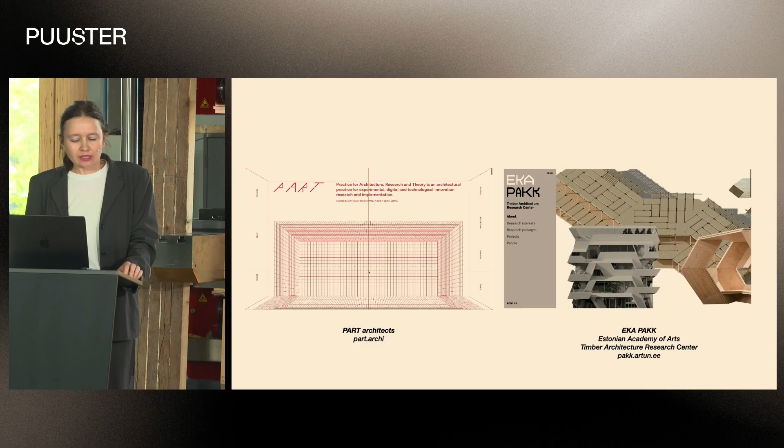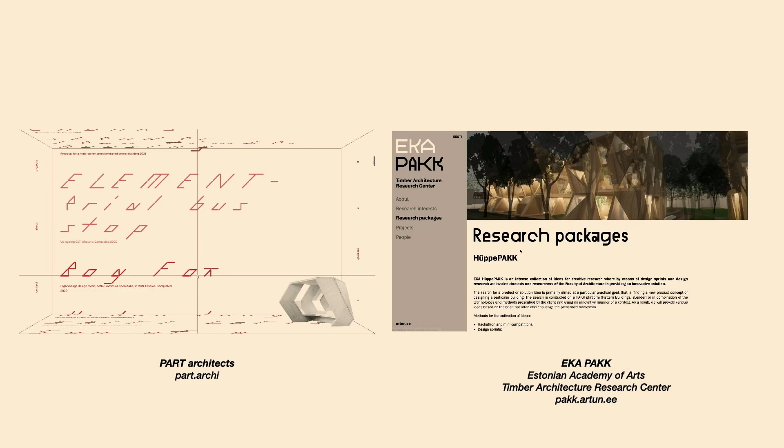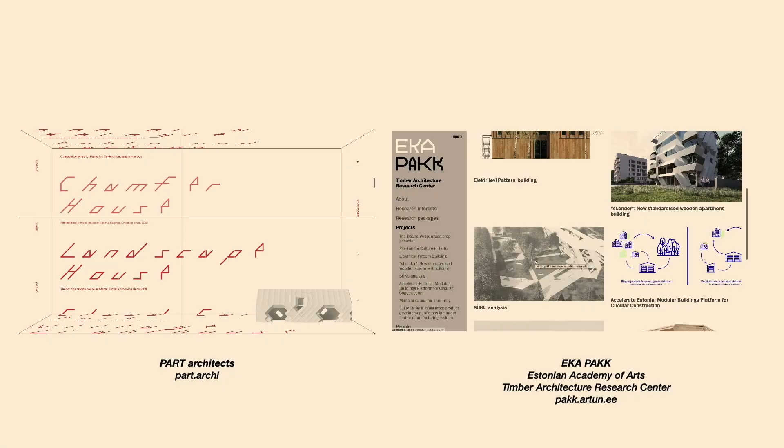The office called Part Architects was started like 10 years ago, and now since 3 years ago, we actually have the Timber Architecture Research Center, PAKK, initiated. And why I'm telling those in parallel is because they are strongly connected to each other. As strongly as saying that with my office partner, we both defended our PhDs in 2020, and since then we became from junior researchers to researchers and started our own algorithmic research group.

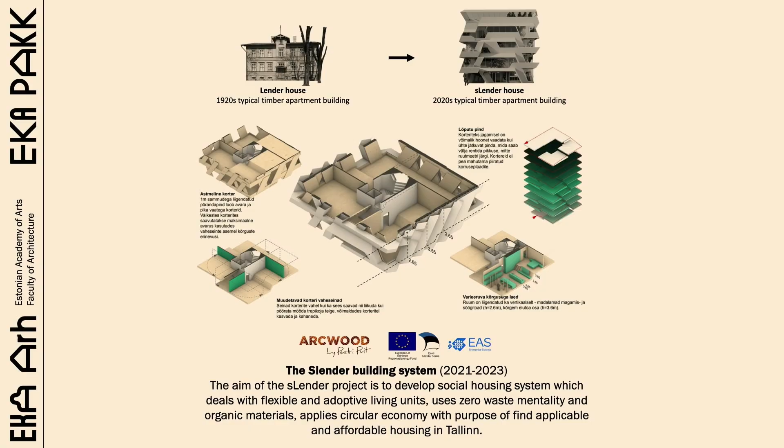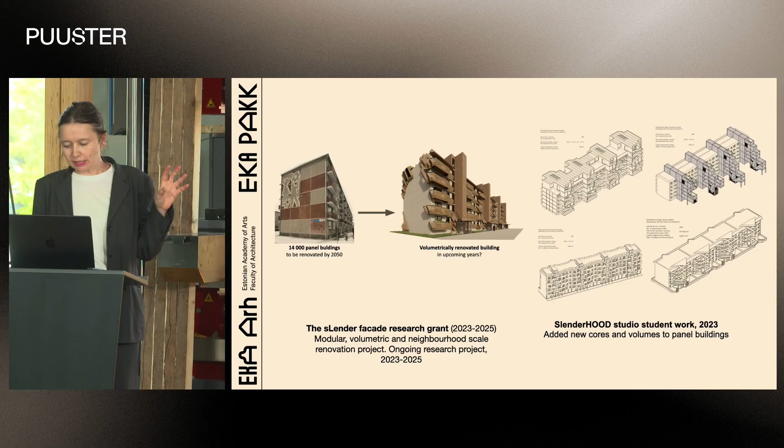With these projects, we actually have been through several studies from the scale of buildings, like a typical new contemporary apartment building for Tallinn, up to small scale bus stations, as well as large-scale renovation wave. But I'm not gonna stop too long on this now, because there's several projects, several scales.

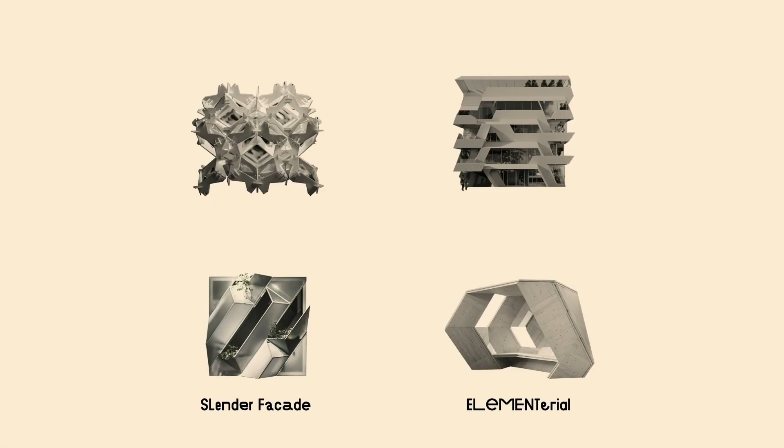I would actually dig into two of them. One direction is the slender facade. Slender is the reference to slender buildings, and the other direction is ELEMENTerial, looking at the residues of CLT.

So slender facade is tapping into renovation wave in the most sustainable possible way, meaning how we can better the life qualities of the people in those apartments. 14,000 panel buildings need to be renovated by 2050, 1,600 is done. So we still have time and a chance to look into bettering the life quality.

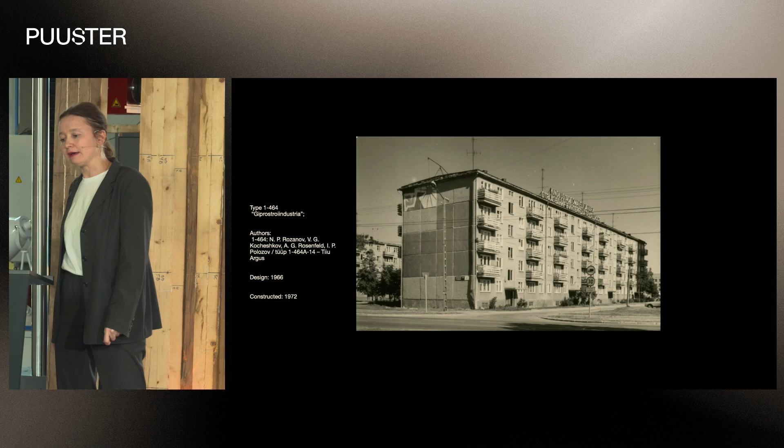This is one of the rare panel buildings that actually have balconies. At one point we started constructing only Khrushchyovkas, where the ceiling height had lowered, the panels, the balconies were reduced, and the windows were smaller.

But what's important is that they were all prefab, and prefab is something that the timber industry in contemporary Estonia is now also trying to re-specialize on, actually prefab panels, mostly connected to insulation.

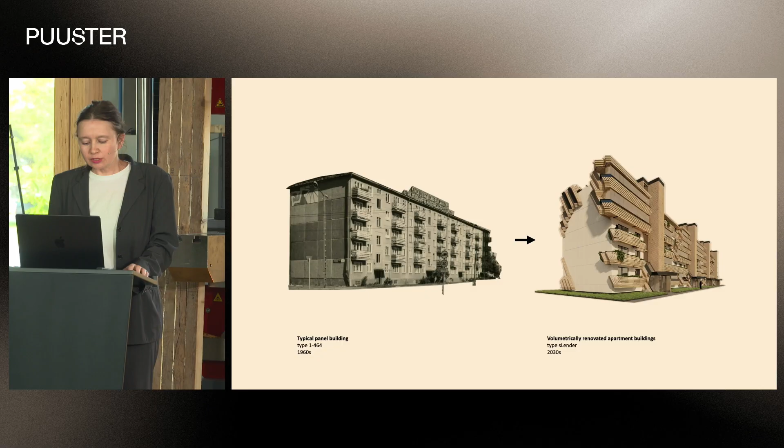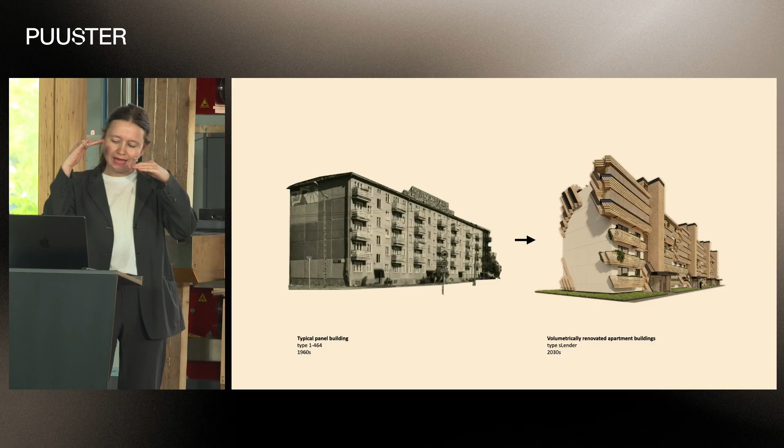So our question was, if we could come from those 60-year-ago buildings into the contemporary world, what's the new layer, the new historic layer that we should add on top of them? Should there be a room extension? Should their accessibility be bettered, etc.?

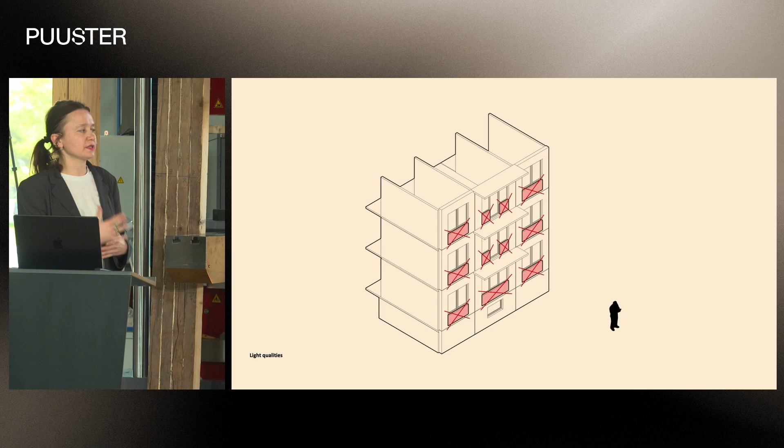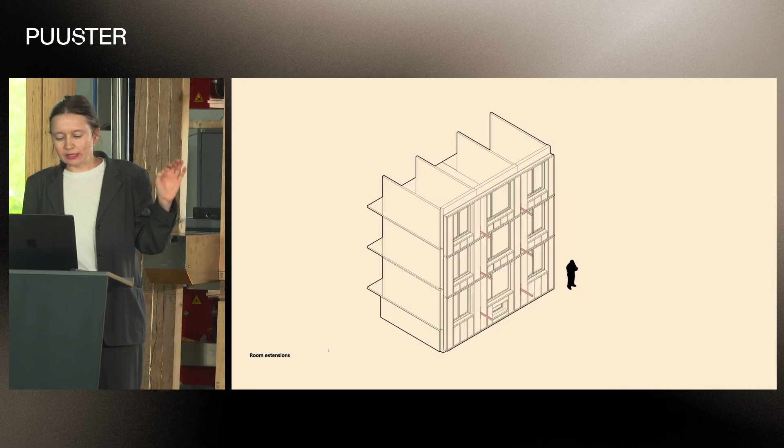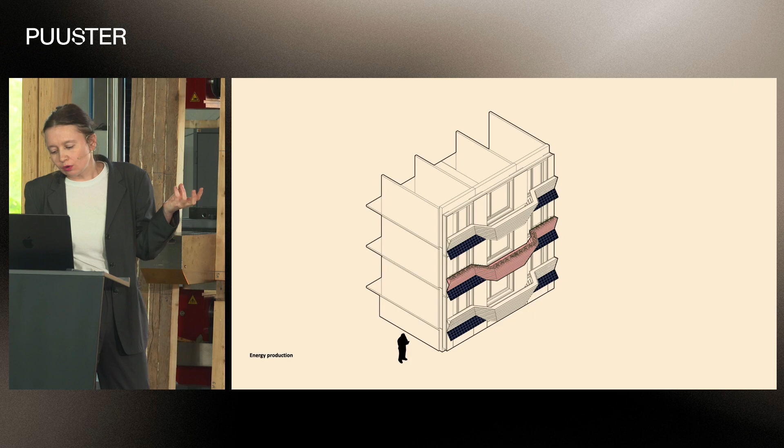Just a few simple moves that we have proposed in our 2-year research grant: what if we would take away the lower part of the apartment windows? What if we add the insulation layer within, where a hidden new structure is embedded, where the cantilevering parts would then be able to hang new balconies?

Whether they're French balconies or energy-producing balconies, or even closed ones. Or what if you extend all the windows that you have in your 2-room apartment into 11 additional square meters?

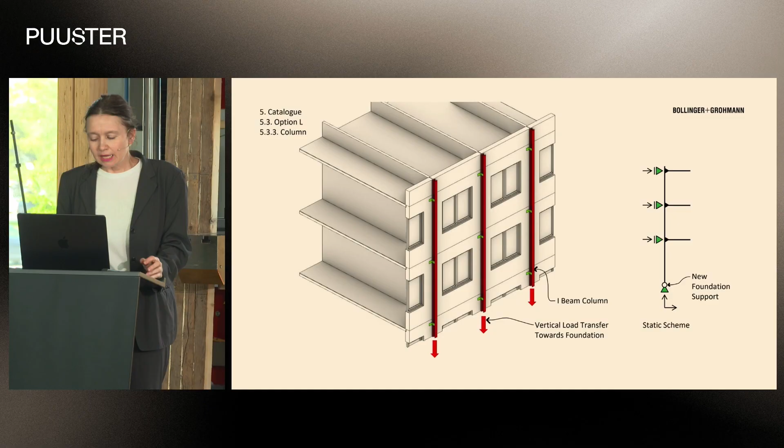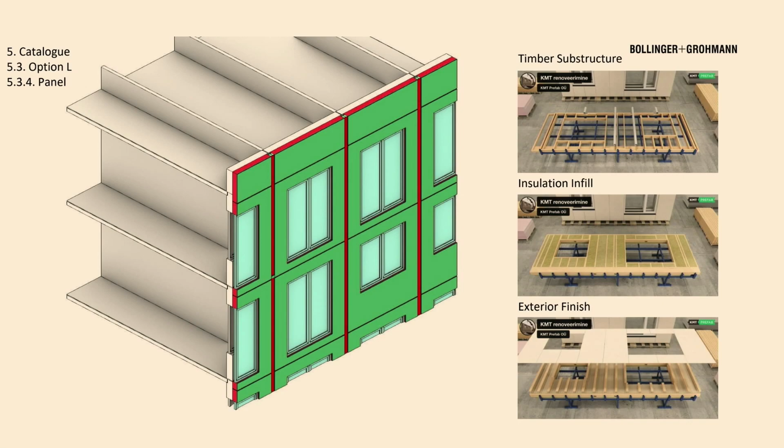This project's been done together with Bollinger Grohmann, an engineering company, really taking a deep dive into how we could implement that now today and how to raise the affordability of these solutions.

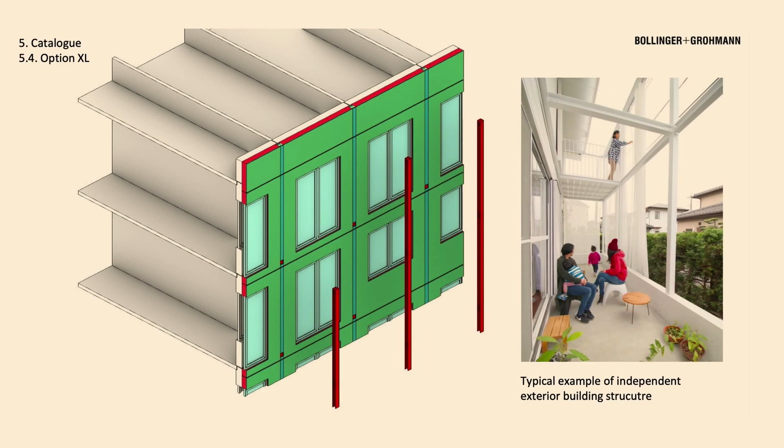Here we look at the steel skeleton at the moment, looking at the maximum cantilevers. It turns out that 1.2 meters is feasible to be extended, the depth of the balcony. But of course, if there's a chance, we can always add poles, add posts to go down and extend it even further.

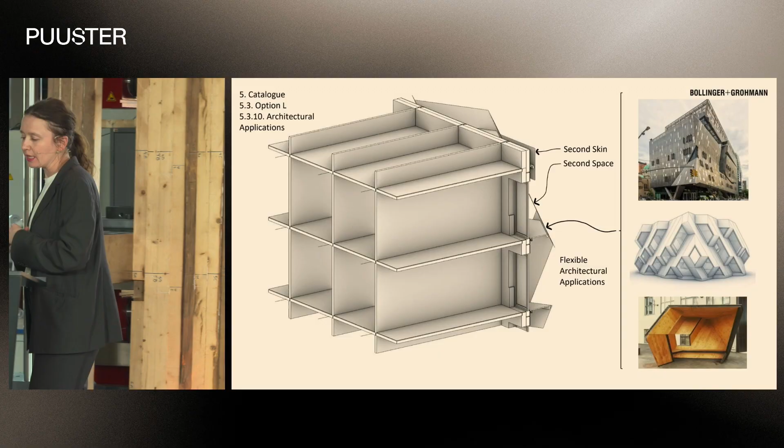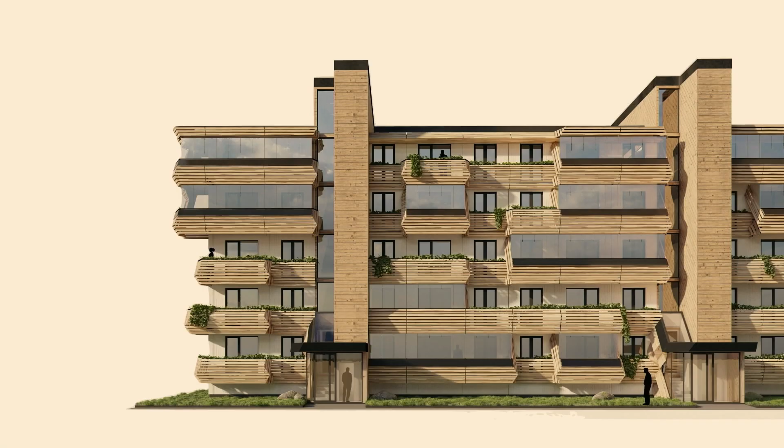But the problem of most of those apartments is the fact that we don't have the land, they don't own the land surrounding their buildings. So basically we are setting up this kind of second skin possibility, and this could be then filled with whatever. It could be filled with unheated spaces, which will have a possibility to be like winter gardens, but of course also extend the famous 8 square meter kitchen. Like all those apartments were with an 8 square meter kitchen, what if we would have actually an additional 11?

And in terms of materiality, so let's get into the timber now.

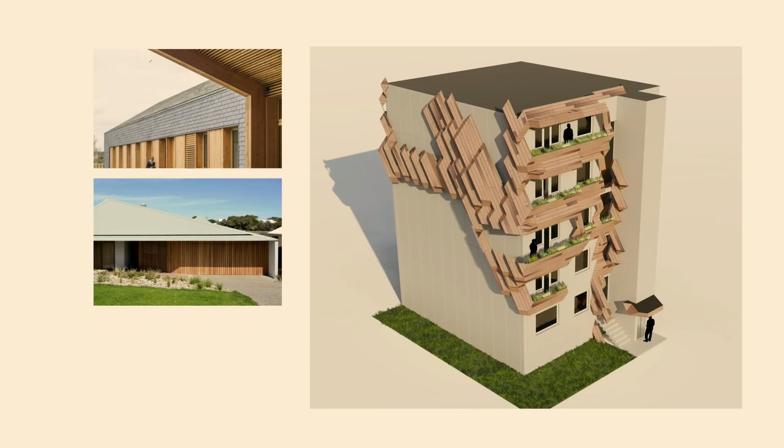I think it has to have a strong contrast. This new layer that we're adding should have a contrast to existing buildings, maybe softening the environment of those areas.

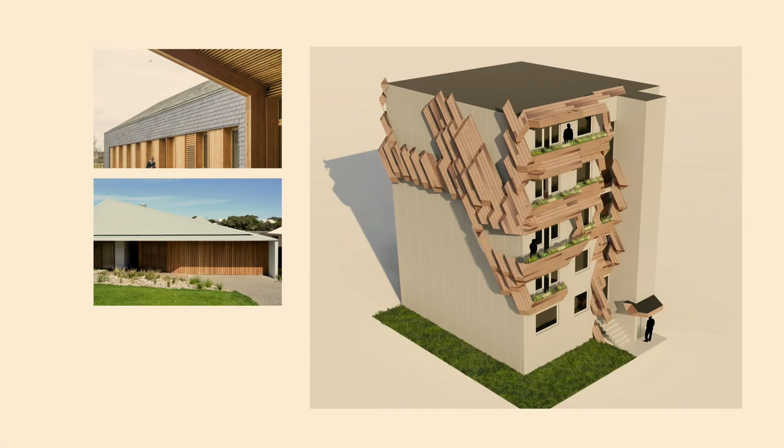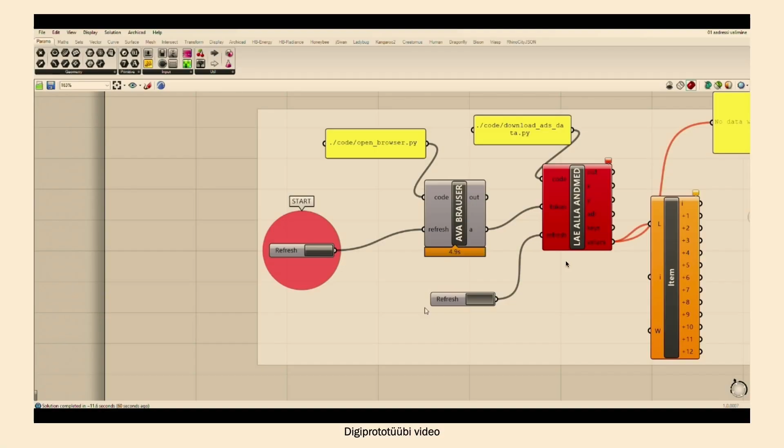What we have been working on is mostly a digital tool, how to bring that back to the users, how to make it possible to work on it algorithmically, automatically, to get information from the digital twin and bring this into your working board, for example, even for architects.

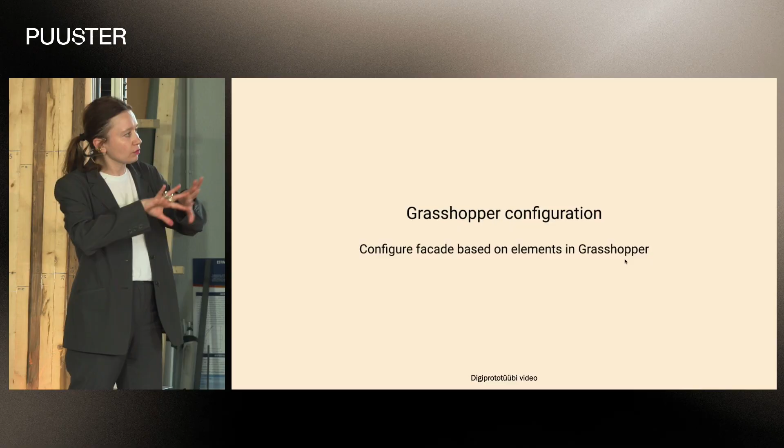I can imagine being an architect and then having this 3D model imported right away with all the surrounding geometries, and then work on this. Maybe this is more of a view of how one apartment owner can start looking into what kind of balconies they want. Basically, what we can do is take this very homogeneous environment into a much more heterogeneous one.

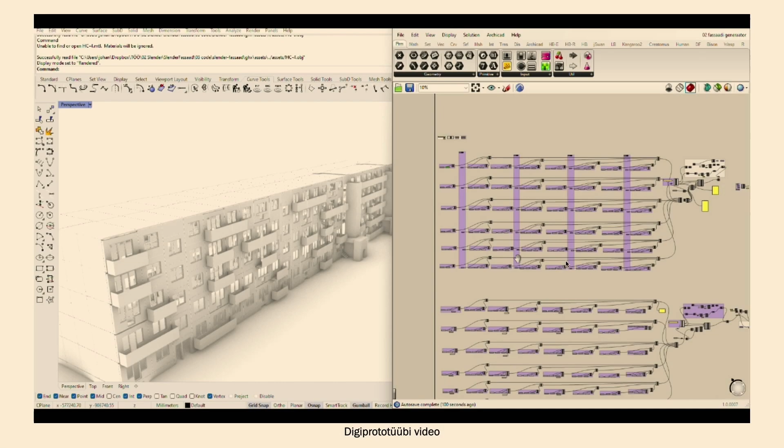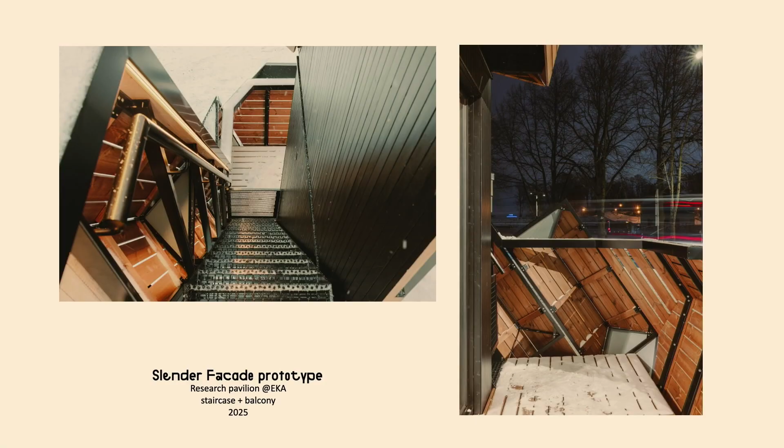Yeah, that's my hope for where the future of renovation would go. In order to convince people—we used to build churches to convince people into believing in religion. I think we're still constructing small chapels.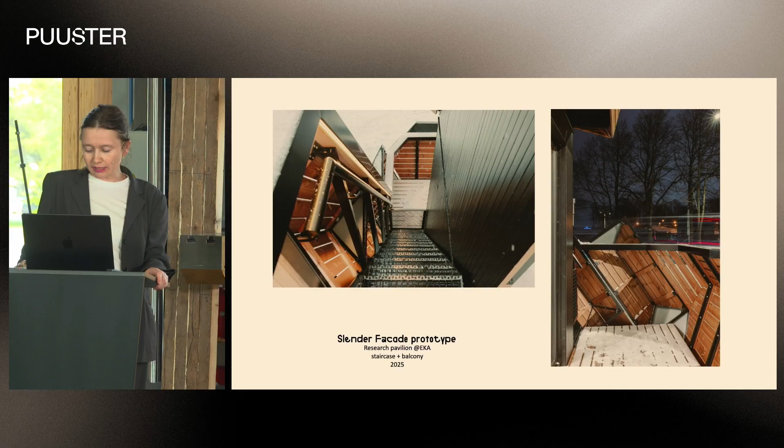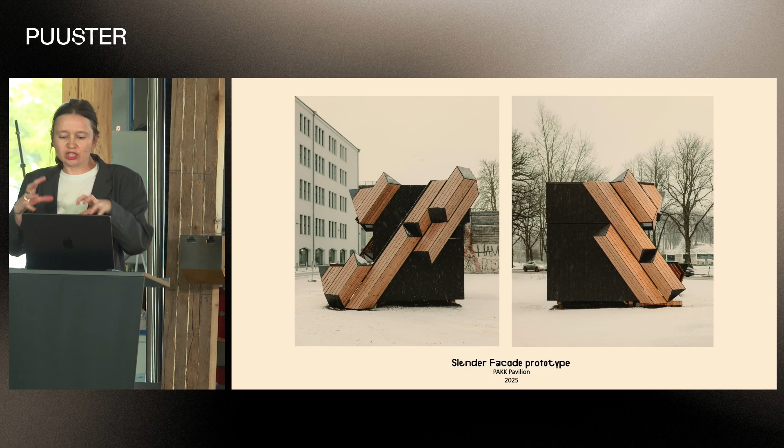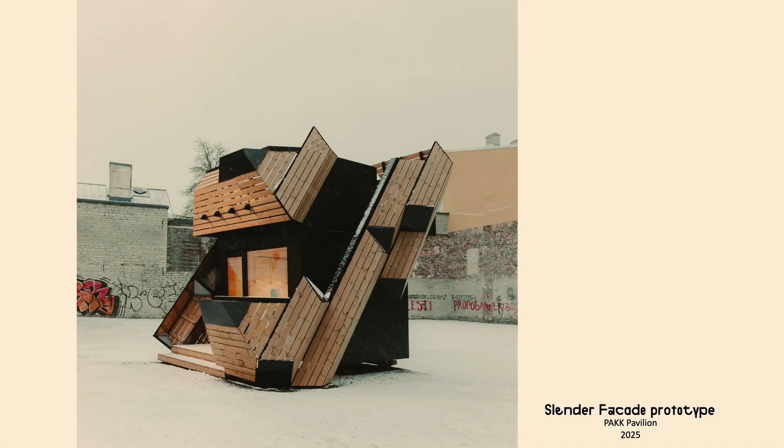This one is constructed next to our university, Estonian Academy of Arts, where we tested all those additional elements: the staircases, the balconies, the chunks that could be energy collecting surfaces, as well as planters in front of the building. So we take this black box as a fixed geometry, the existing building geometry, and then we added the volumetric facade.

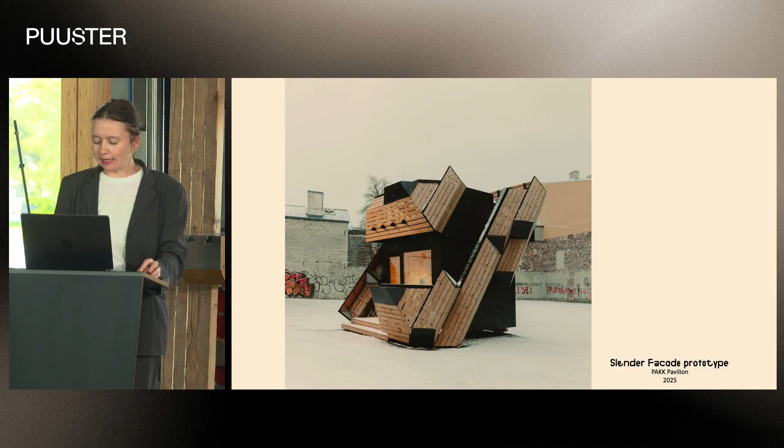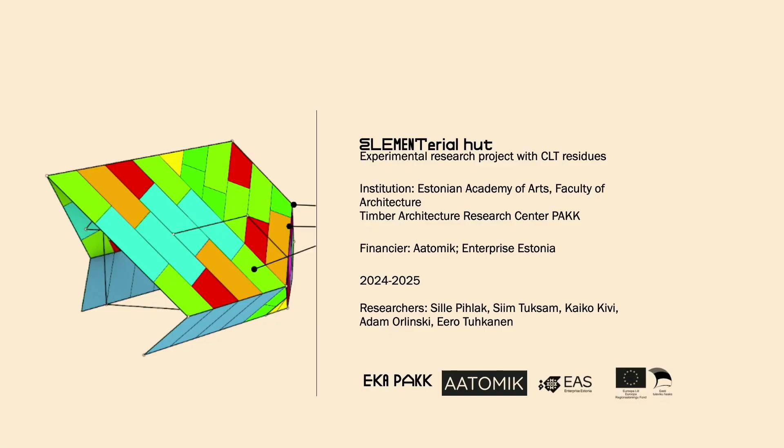Now jumping to another side, the SLEMENTerial study. As said, in 2020 we already looked into that, and now 5 years later we've been asked what if we continue this study, by Aatomik, as well as looking at the residues of what we can do with it. The residues are quite simple output of the CLT industry.

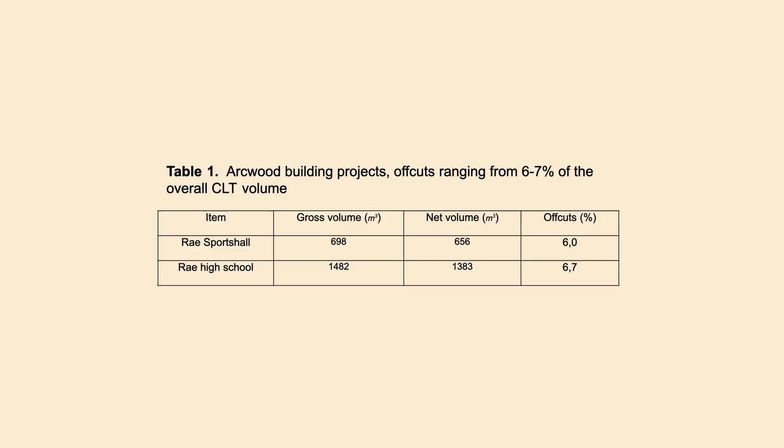All those windows and doors that are cut off—available information says it's up to 20%. We asked our biggest CLT producer in Estonia, Arcwood, what their percentage is, and it's between 6 and 7% of the material used being an offcut. That's a huge number.

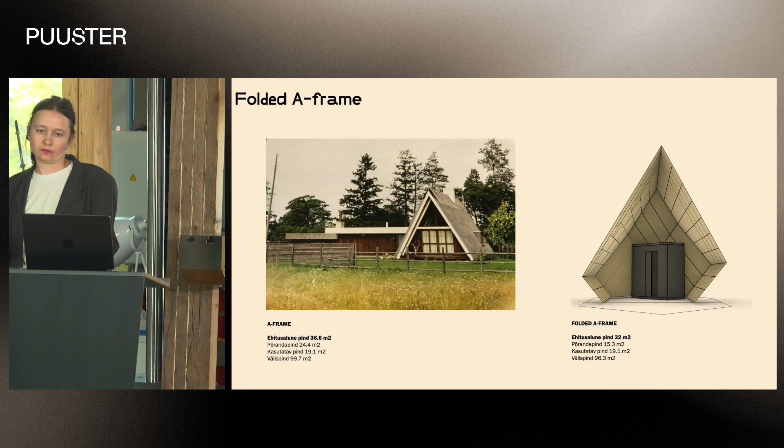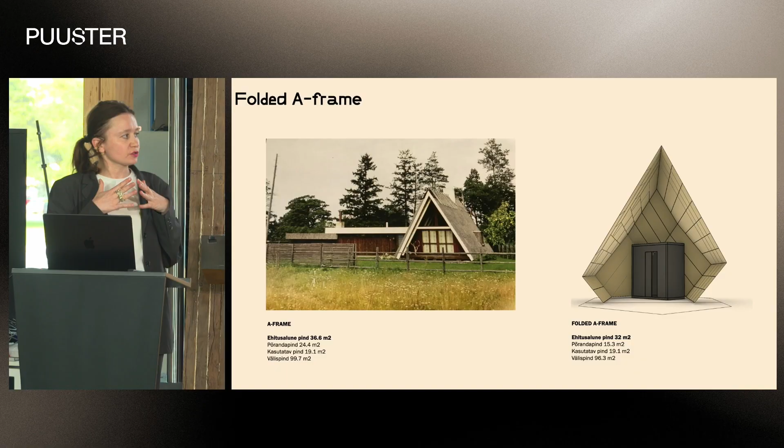So the question was, can we start constructing out of those residues? We looked at the normal A-frame sort of 1970s typology for summer housing, and we realized there's this strong direction, a strong connection. What if we break it back in, and have much more of the building surface underneath in this case?

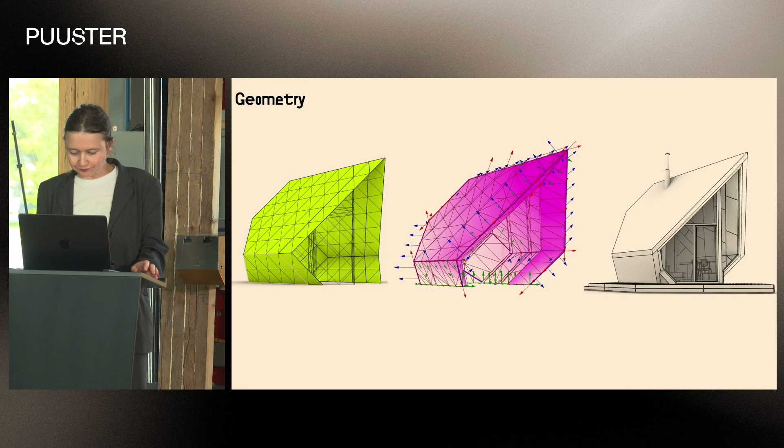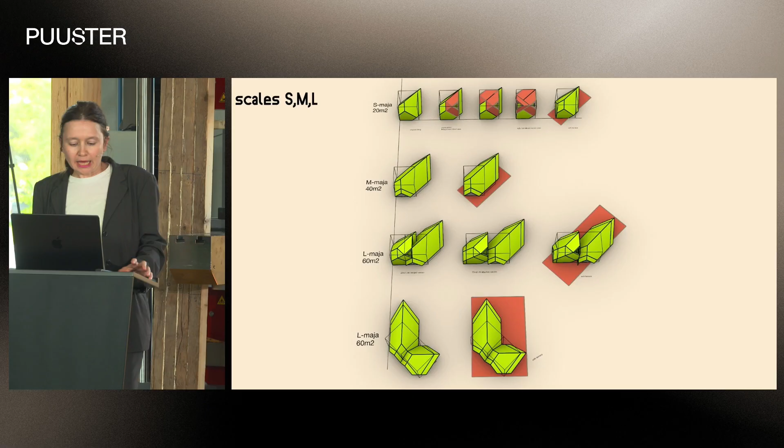And then, of course, working on the geometry, the structural studies, and resulting within this 4-month research project into a building. These are the S, M, L scale buildings ranging from 20 to 60 square meters, looking at ways how the sauna house could grow into a bigger family house.

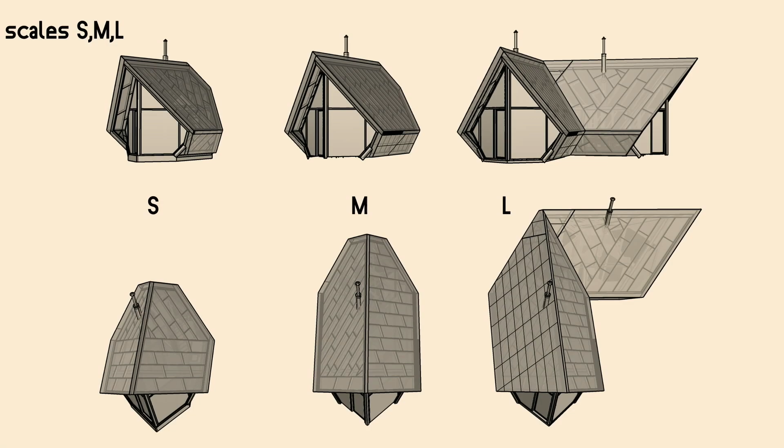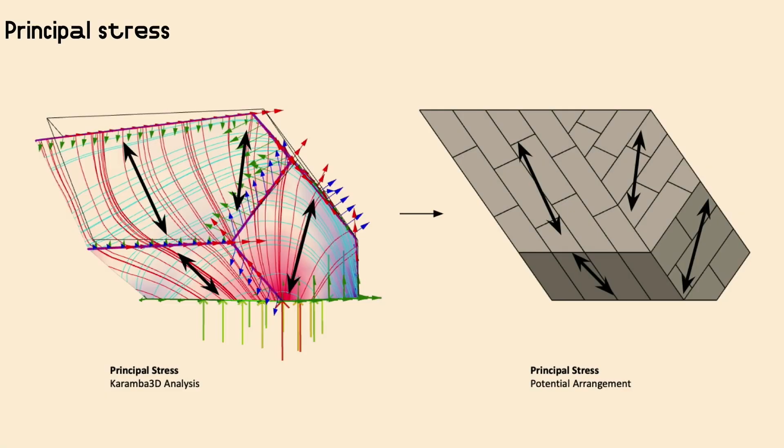Our structural studies in terms of the internal forces, the different kinds of tools that we applied, again together with Bollinger Grohmann, helped us understand how we should stitch our elements together, following the principal stress directions of those elements.

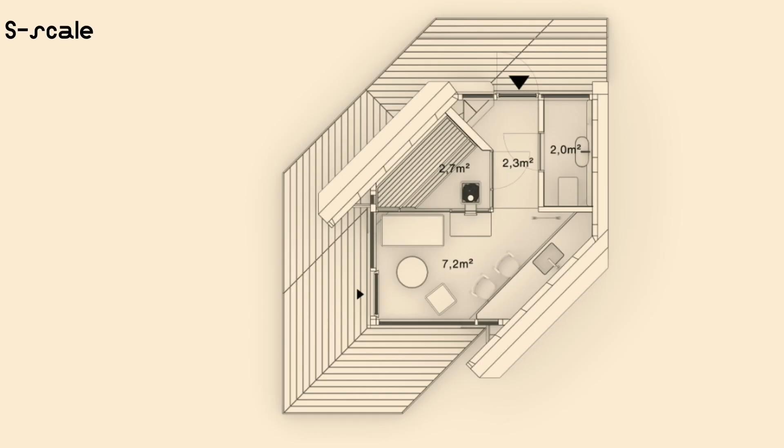Arriving at assembly questions, and also the potential interior environment qualities this could have. For those scales, I'm now just showing you the small one, but it's super packed, yet still has open accessibility from both sides—you have a small water unit, as well as the sauna and the living part in front of it.

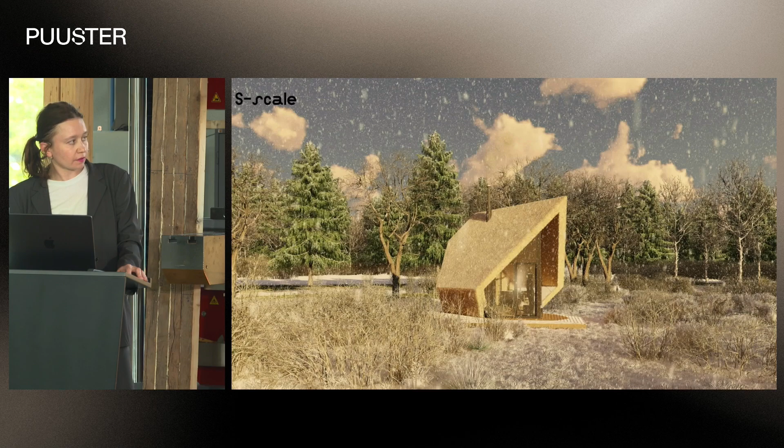We are hopefully stepping into a next stage with this project to really land on a building system that allows all of those materials, as well as those spaces, to be tested.